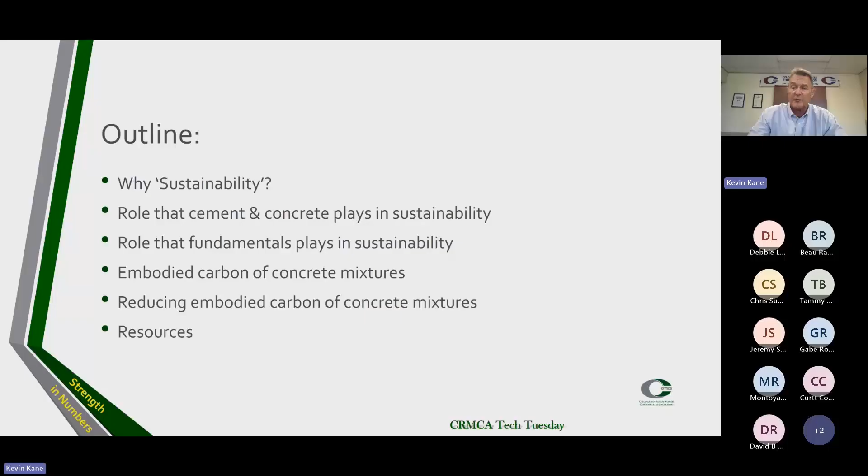Okay, the outline: why sustainability? We're going to cover some background on sustainability, the role that cement and concrete plays in sustainability, and then the role that fundamentals play. We cannot forget our fundamentals - we cannot be sustainable if we do not execute our fundamentals, kind of like blocking and tackling in football. We're going to talk about reducing the embodied carbon of concrete mixtures, and at the very end I'll share some resources I used to put these slides together. I'm also going to refer back to the Tech Tuesday presentations by Zach Ballard back in April and Jim Schneider in June - in fact I may have stolen some of their slides. I want to tie the whole thing together on proportioning, materials, and what we can do as an industry to reduce the embodied carbon of concrete mixtures. So with that, let's take it away.

Why sustainability? What is all this sustainability talk about? According to the UN Environmental Global Status Report, the world is projected to add 2.7 trillion square feet of buildings by the year 2060, driven by soaring needs for housing and infrastructure. That's an additional 2.7 trillion square feet, which is going to double our current global building stock. That's a lot of building.

The UN report urges the building industry to reduce embodied carbon of building materials, and also urges building designers and owners to reduce operational carbon by designing disaster-resilient buildings for the future with zero energy consumption. I want to make the distinction of embodied carbon versus operational carbon. Embodied carbon means all the carbon that went into producing a given product, whether it's concrete, cement, lumber, or steel.

Operational carbon means the amount of energy that took place after the building went into service. We're going to be talking mostly about embodied carbon, but I am going to start off with an example of operational carbon.

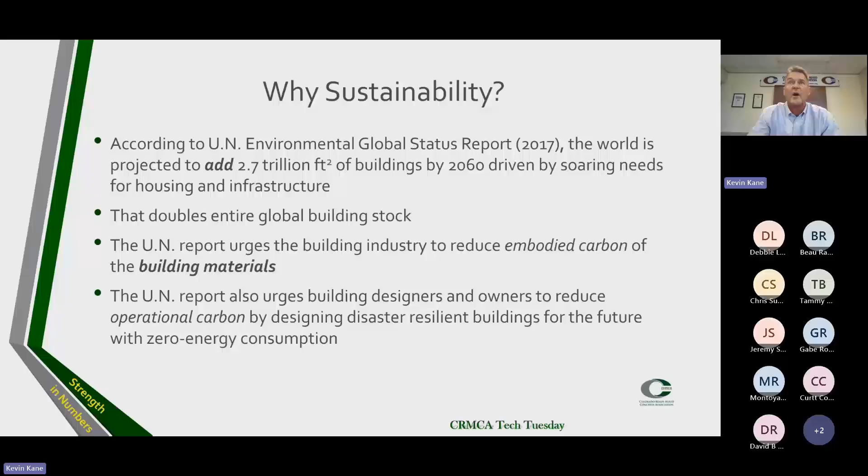To meet this challenge, the NRMCA adopted Architecture 2030, the challenge in 2012. The goal was to reduce operational carbon and embodied carbon from the built environment to net zero by 2050.

Reducing these carbon emissions is the key to addressing climate change. Now, it doesn't really matter who you voted for, where you lean politically. Doesn't matter if you voted for Trump, doesn't matter if you voted for Biden, doesn't matter where you sit on the political spectrum. Sustainability is a business necessity. So keep that in mind. A lot of people get emotional about climate change and global warming, but let's just keep this on a business level, how it affects us as a business.

In 2021, the NRMCA reaffirmed its commitment to reducing its carbon footprint by supporting the PCA roadmap, which is actually now the ACA, for American Cement Association. They changed just in the last couple months to the American Cement Association. So the NRMCA reaffirmed its commitment to reducing its carbon footprint, supported by the ACA roadmap to carbon neutrality.

Sustainability is therefore a strategic business necessity. Like I said, doesn't matter how you feel about global warming or climate change. It's a strategic business necessity.

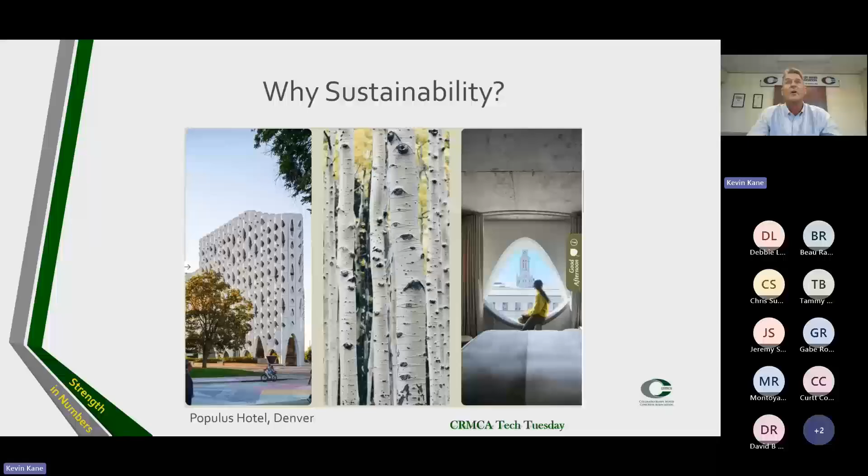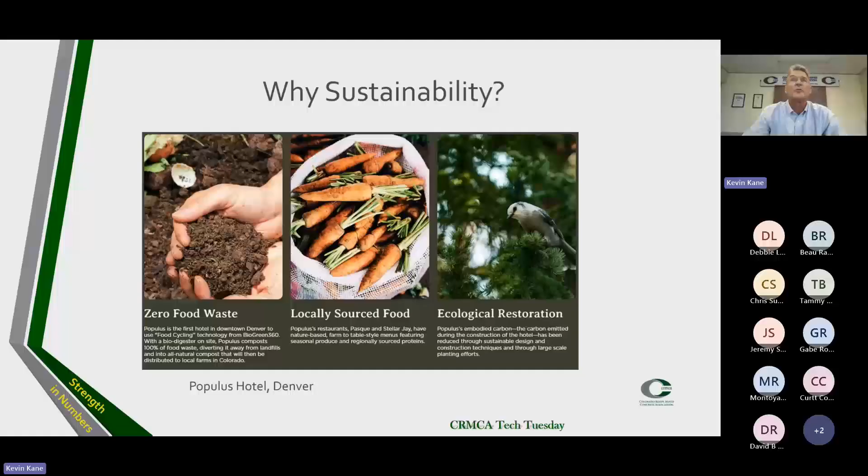Here's one of the rooms, and the thing I really like about this hotel is there's a lot of exposed concrete. So it puts our product right out there as a showcase. Some people may go, my God, why did they pick exposed concrete for the rooms? Well, there's a reason for that. We'll get into that in a couple slides. But so it's a very unique hotel.

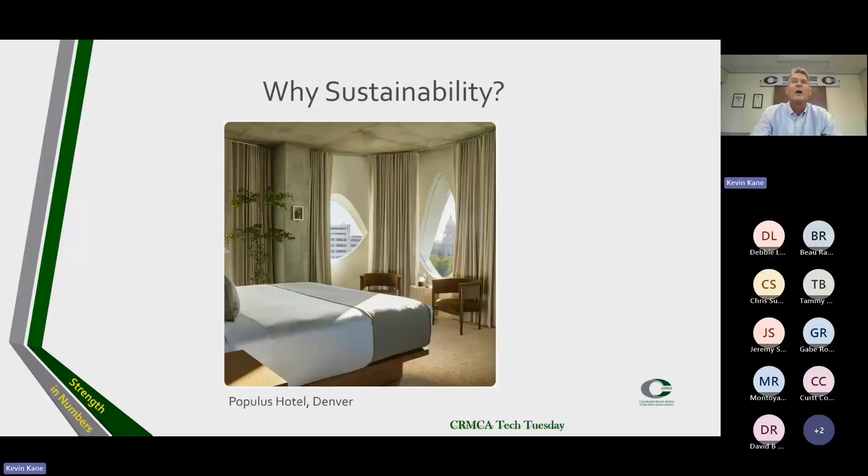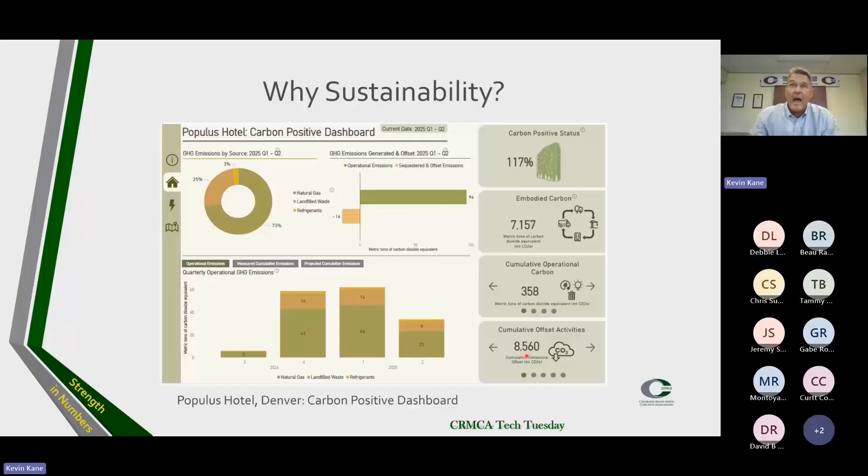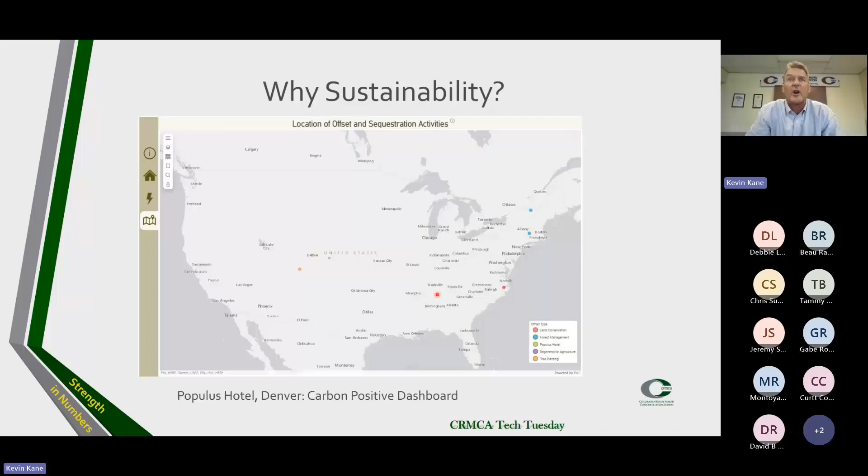They went negative, so they had to capture some offsets on this. So they went around the country and they planted. Here we are, here's the Populus Hotel in Denver. Well, there's a little dot way over here in Gunnison. They're doing a lot of tree planting and reforestation in Gunnison. They're doing some reforestation efforts in Massachusetts and Vermont, and they're doing some tree planting down here in North Carolina. So there's a lot of creative things they can do to maintain a carbon positive status, which I think is really kind of neat.

So that answers the question, why sustainability? It's a strategic business necessity. If one business did it, and they have customers, their customers will take these ideas to other businesses. This isn't going away. Everybody is going to be attracted to building structures like this.

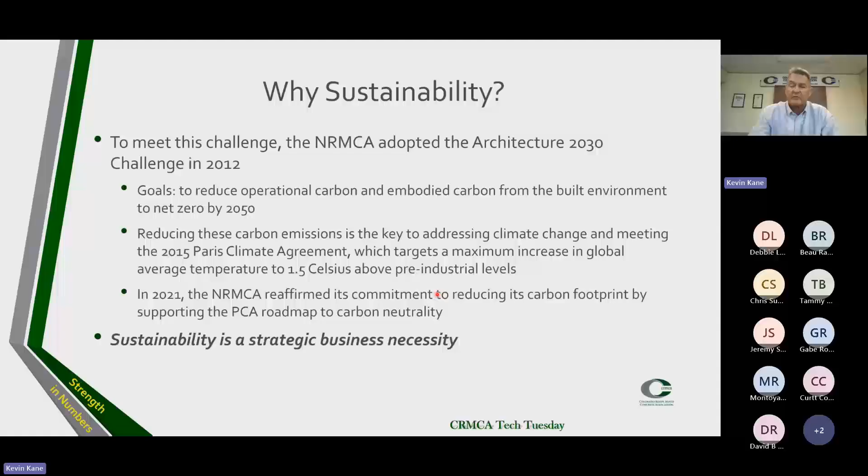So that brings us to us, the cement and concrete industry. Now, how are we viewed right now? Well, kind of negatively, right? So look at some of the glaring headlines from the media.

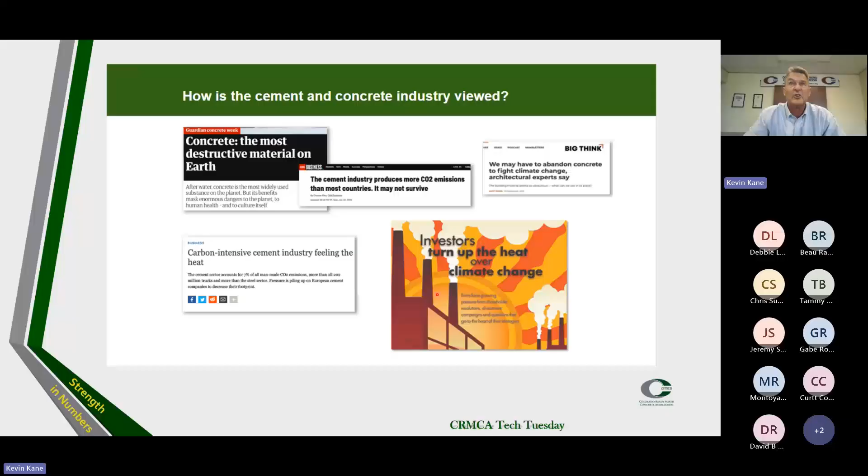Concrete, the most destructive material on Earth. The cement industry produces more CO2 emissions than most countries. It may not survive. We may have to abandon concrete to fight climate change, architectural experts say. So it's kind of doomy and gloomy out there. Not a lot of good news.

So this reminds me of the scene from Apollo 13, in the middle of a crisis, where Gene Kranz, who was in charge of all the nerds at Mission Control in Houston, said, let's look at this thing from a standpoint of status. What do we have on the spacecraft that's good?

We've got a lot of things that are good about concrete. A UN report urges building designers and owners to reduce their operational carbon by designing disaster resilient buildings. What's more disaster resilient than concrete? You know, we've all seen the images of the wildfires in California, the flooding down the Guadalupe River, the hurricanes down the Gulf Coast. Concrete is a very disaster resilient building material, and we should play that card.

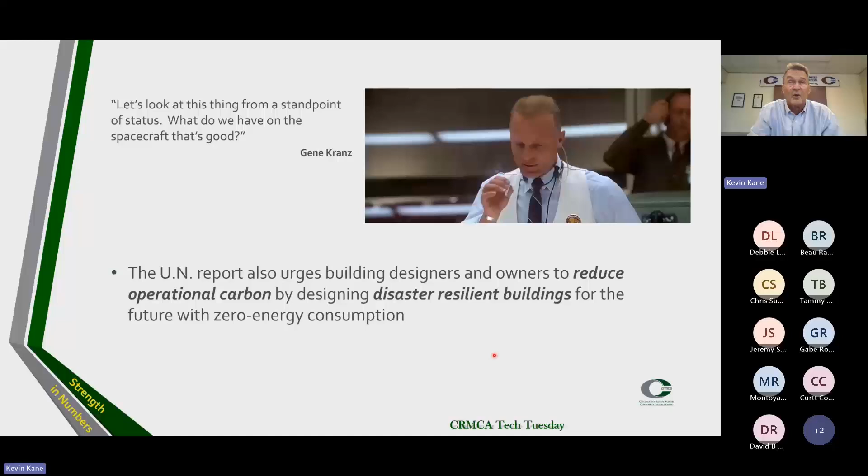Concrete is also a low VOC emitter, volatile organic compound emitter. That's why the Populus Hotel chose to leave a lot of the concrete exposed and not cover it with wall coverings that do emit VOCs.

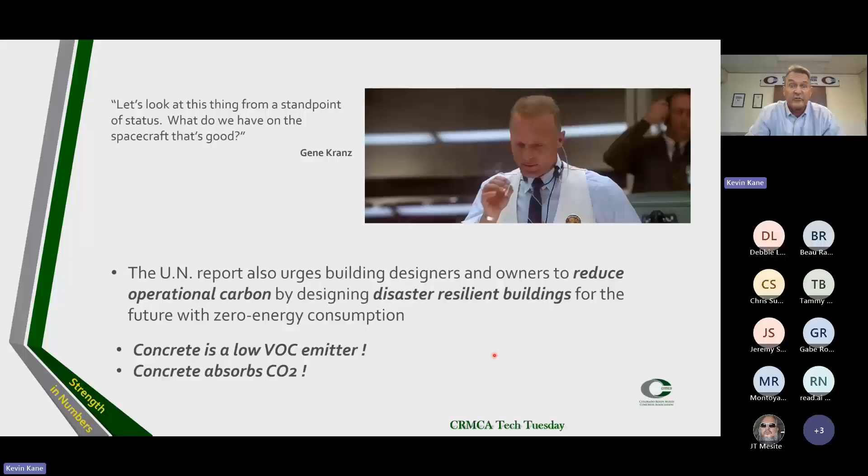Concrete also absorbs CO2, which years ago we didn't think was that big of a deal. Well, we think it's a pretty big deal now. In fact, there's some research that says during the lifespan of a building, the building will have absorbed half the CO2 it took to build it. So that's a pretty neat attribute, provided your reinforcing steel has the proper amount of cover on it. So concrete absorbs CO2 - that's a positive.

So what are the negatives? Okay, concrete is the most used man-made substance on Earth. It's not going away. You're not going to be able to have civilization without concrete. Now, cement manufacture contributes to 10 to 12% of total CO2 emissions on Earth. So we're one of the big polluters on Earth.

So to lower the embodied carbon of concrete, we must lower the embodied carbon of cement. And here's an example of a concrete mix design. This calculation was published in the CDOT white paper on the development of CDOT embodied carbon benchmark limit values for the Buy Clean Colorado Act. If you look at the calculations here, the cement is responsible for 90% of the global warming potential of this particular concrete mixture. So to lower the embodied carbon of concrete, we must lower the embodied carbon of cement.

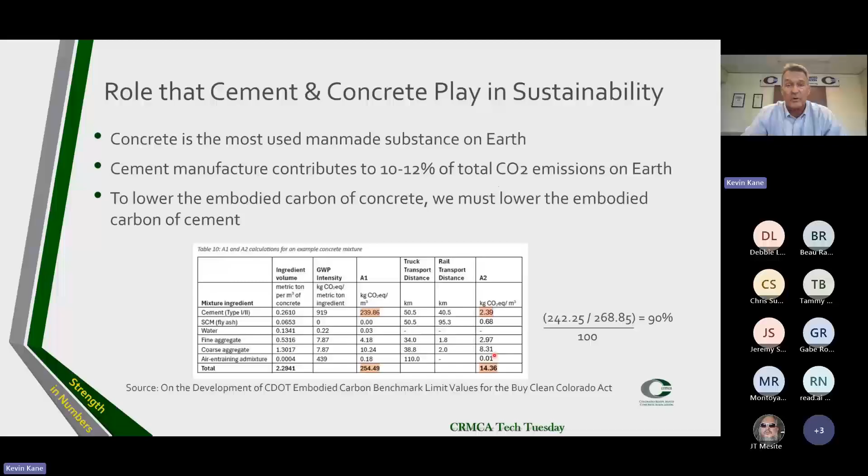So how do we do that? Well, let's get into a cement plant. This is a typical cement manufacturing facility. It's a highly complex process.

It all starts here in the quarry with very heavy machinery, very heavy excavating equipment that burns an awful lot of diesel fuel. Then we go to a primary crusher, which operates off a very large, high horsepower engine. Then we go to a raw mill that has an even bigger motor, 6,000 horsepower at the Holcim Portland plant. Then we go into the pyro process - the kiln, preheater, and pre-calciner.

This is where most of the energy is required to drive the calcination process. We're mining calcium carbonate, and we have to convert it to calcium oxide. In the process, we release 40% of its original mass in CO2. So the calcination of the limestone to calcium oxide is a big polluter. And the fossil fuels it takes to get the kiln to the 1500 degrees centigrade temperature to kick off that calcination process - that is also a big CO2 emitter.

So you can see the bulk of the CO2 emissions come from this little section right here. It's all in the pyro process. So we're not going to put a dent in anything by converting our equipment to batteries or to natural gas.

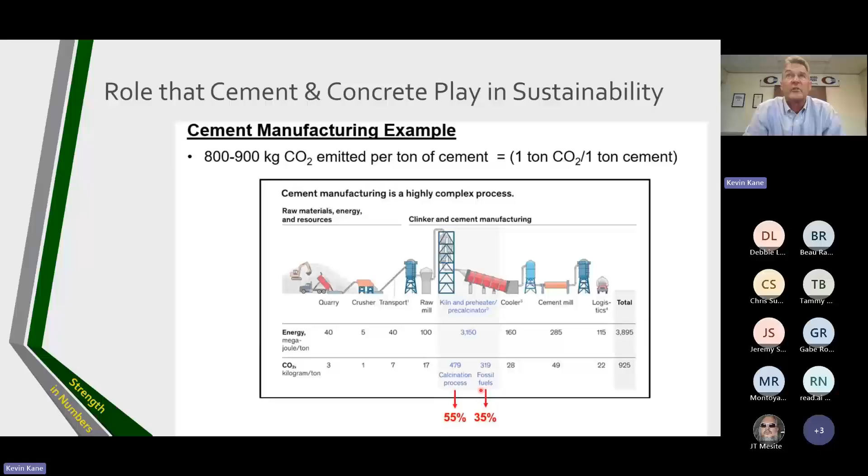So to lower the embodied carbon of concrete, we therefore must lower the embodied carbon of the cement. Now, over here on the left, let's look at ASTM C150 Type 1-2 cement post, say, 2005. Post-2005, it had 5% limestone, roughly 4% gypsum, and it was ground with roughly 91% clinker. So it's this 91% clinker in ASTM C150 Type 1-2 cement post-2005.

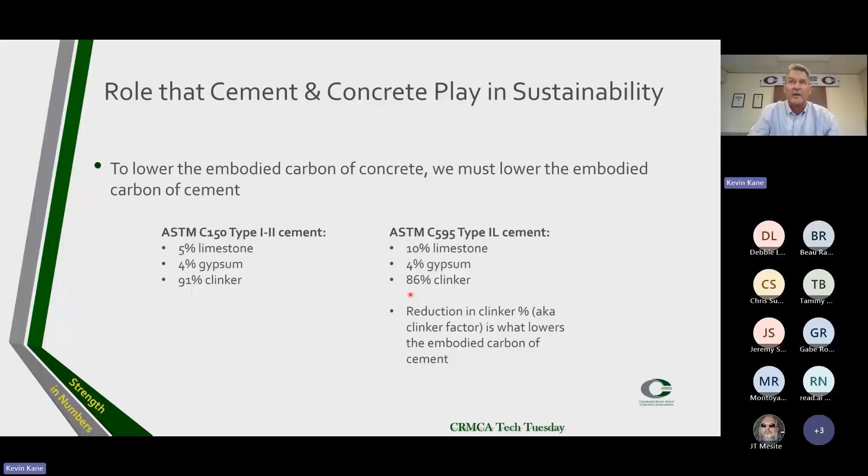ASTM C595 Type 1L cement has 10% limestone, or up to 15% limestone. Presently, most producers are around 10% limestone, and again, roughly 4% gypsum. And now we've reduced our clinker factor from 91% to 86%. So it's this reduction in clinker percentage, also known as the clinker factor, that's what lowers the embodied carbon of cement. So that's the only lever we have to pull right now on the cement side.

So Colorado passed a Buy Clean Colorado Act effective January 1st of 2025, and they set these benchmark limits on global warming potential of our concrete mixtures. So for everyday Class D concrete, which is the bulk of our CDOT work, the global warming potential limit is 365.1 kilograms of CO2 per cubic meter.

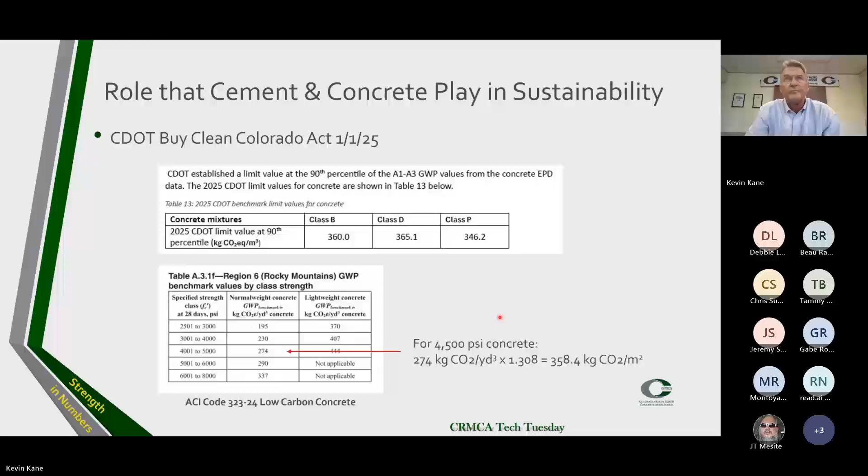So let's talk about the role that fundamentals play in sustainability. Concrete with higher variation with respect to compressive strength performance will need more cement than concrete with lower variation. Kind of hard to get around that.

And from the ASTM C917 report, Tony Fiorato wrote, to minimize the variability of concrete, it is necessary to control the uniformity of constituent materials as well as the uniformity of batching, mixing, transporting, placing, and curing. Tony Fiorato is a pretty smart guy. He pretty much nailed it.

If you want low variability in concrete, you've got to control the uniformity of your materials and your processes. So, as ready mix producers, insist on good quality materials that are consistent. Insist on consistent processes from your operational departments: measuring, batching, mixing, transporting. And if you're on the testing agency side, on the QA side of the business, insist on good quality control and good quality assurance testing.

And let's also promote good construction practices. This is kind of an important one because it seems to be a hot topic right now, because a lot of contractors are really struggling with the changes that have been made from concrete made with ASTM C150 Type 1-2 cement to now ASTM C595 Type 1L cement. So we really need to get out and promote good construction practices so we don't have so many problems associated with finishing problems, plastic shrinkage, and scaling in the field.

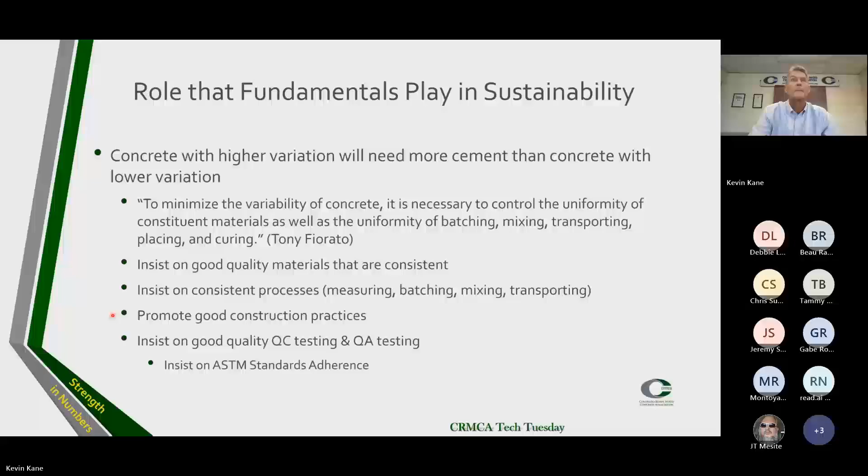Going back to what Zach Ballard presented, you can't control what you don't measure. Low variability, you're going to make money. High variability, it's going to be tougher to make money.

If we look on the left side of the scale here, here's our required 3,000 PSI. If you have low variability, you only need to average, in this example, 3,326 PSI. If you have high variability, if you don't have good control of your materials and your processes, you have to average a much higher compressive strength to satisfy this 3,000 PSI mix requirement.

So low variability is good. High variability, bad. It's going to cost you more money, and it's going to take more cement, which is not in line with sustainability.

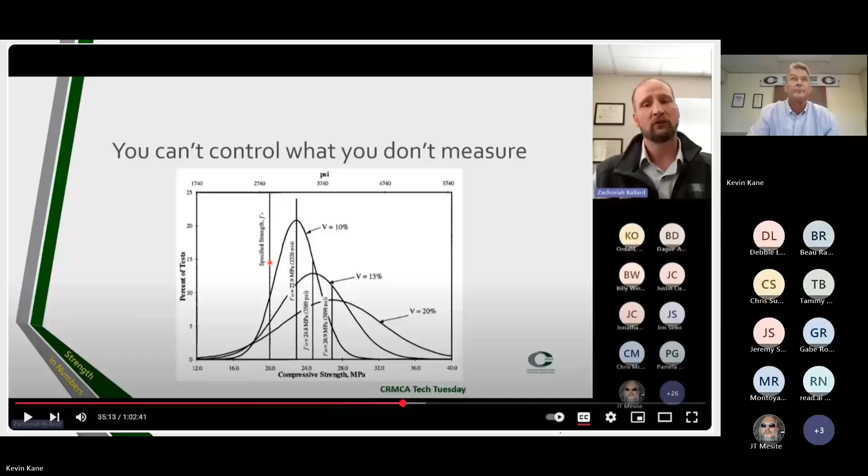Insist on ASTM standard adherence. Boy, oh boy, I've been doing this for 35 years now, and we're still talking about adherence to ASTM standards in testing. And the elephant in the room is always the initial curing. It's a challenge for the testing agencies to supply the proper curing facility for every job they're going to test that day.

But you've got to get out in front of these things in the pre-construction meetings. Post-construction meetings are not the time to talk about initial curing. Talk about those in the pre-construction meeting, when it can be decided who, how, when, where are they going to put the initial curing facility.

If we take a look at this study that we did back in 2014, this was a test fest, a CRMCA test fest event that we did in Grand Junction, Colorado. This is 3 sets of cylinders cast from the same sample of concrete, and we varied the initial curing conditions.

The first set of cylinders was put in a Rubbermaid cooler filled with water. Not very scientific, a Rubbermaid cooler that at that time you could have bought from Walmart for 20 bucks. You fill it with water, put your cylinders in there, and measure your min-max, and this is well within the specification limit of 60 to 80 degrees. This is the resulting compressive strength of the properly initially cured test specimens.

Another set of cylinders from that same sample of concrete, we put them in a Rubbermaid cooler with no water for a 24-hour initial cure. And look what the temperature went up to. The heat of hydration from the concrete cylinders was detrimental to maintaining that 80-degree maximum temperature. It went up to 105 degrees, and there was a resulting decline in the later age strength development.

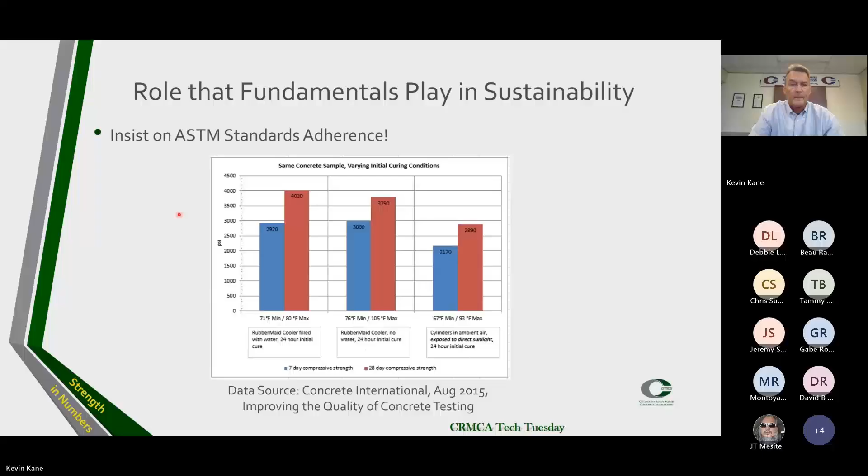And it's not always the testing, it's not always a test. Sometimes it's us, and we have to admit that. Here's 2 mixes that Dave Figurski and I ran back in January of 2025, where we wanted to test some of the plastic and hardened attributes of our Utah plant, Devil Slide in Utah, with our Type 1T cement.

So we made our first mix. We gathered an aggregate sample from a local producer right here in the Front Range. We didn't particularly like the sample of coarse aggregate that we got - the gradation was way too fine, it was pretty dirty - but we ran the mixes anyway. And we ended up having to discard the whole series because we didn't like the results we got.

We went out and got another sample of the same source of aggregate. This time the quality of the aggregate was right where we wanted it, and look at the difference it made in the proportions. Both of these proportions produced about the same workability - look at the difference in water content.

This mix took 335.6 pounds per cubic yard to get that 3 1/4 inch slump. This mix, with properly graded and proper clean aggregate that met the specification, only took 315.3. And we actually had 10.8 pounds of water left over, producing the same amount of workability. Look at the difference it made at 28 days in compressive strength, over 1,000 PSI.

So it's not always the testing. We have to insist on adherence to standards of testing. We also have to insist on adherence to standards of the materials we're making our concrete with.

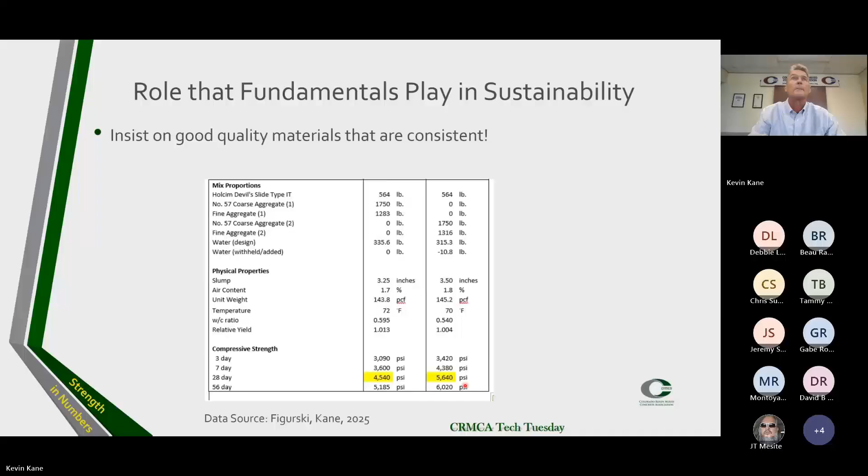This was on Jon Belkowitz's LinkedIn page just last week.

With respect to the role that fundamentals play in sustainability, actively managing problems versus reacting to problems is so important. Stay a step ahead rather than three steps behind. Recognize the root causes to the common problems and take the steps to minimize their reoccurrence. Think the process through and manage your obstacles and challenges.

Removing and replacing concrete is certainly not a sustainable practice. Root causes to common problems - what's a common problem everybody's having right now? Are we having problems making our concrete, controlling our concrete? No, but our customers, the contractors, the finishers, they're certainly having some common problems. So that's where we get back to the construction practices. If construction practices weren't important before, they're sure important now.

None of the practices that we're advocating are any different than what they were before we made concrete with ASTM C595 Type 1L cement. It's just that not everybody was following them by the book. The book is written for a reason, by very accomplished professionals that know their business. These aren't just people that read and write books and never get out of the office - these are professionals that write these construction practices, accomplished professionals that know their business. We have to follow the best recommended practices in the field.

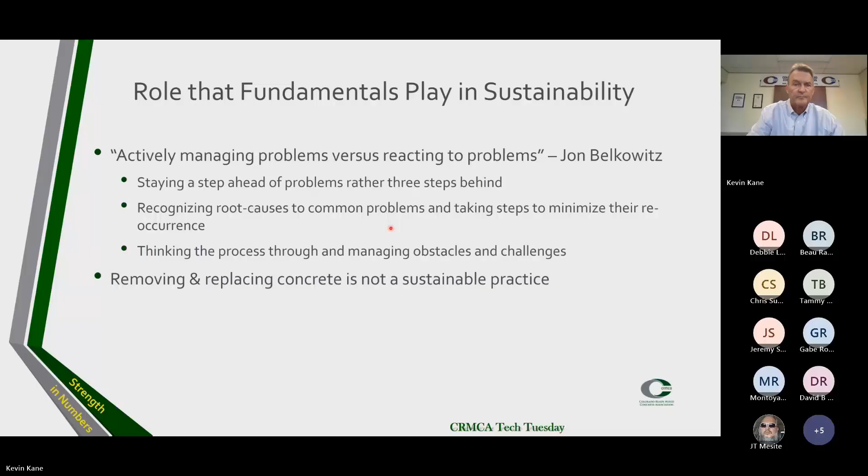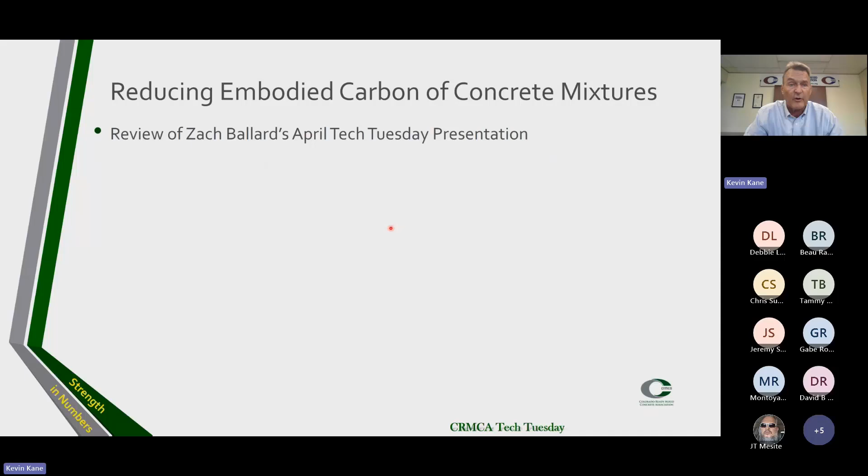Okay, reducing - let's talk about reducing the embodied carbon of concrete mixtures. And like I said before, I'm going to be throwing back to previous presentations - one that Zach Ballard did in April, and the other one that Jim Schneider did back in June. So let's go back to Zach's example on how he walked us through the steps in proportioning using ACI 211.

When he got to step 8, which is pretty much the final step in the proportioning, your work is not done yet. So he came up with a concrete mix that had 708 pounds of cement, 340 pounds of water, with these proportions of coarse aggregate and sand by following the steps in ACI 211. But your job is not done - now you have to go put them in a lab mixer.

But first, I'll bet there's not many ready mix producers out here that have a mix that has 708 pounds of cement and 340 pounds of water for a 5,000 PSI non-air entrained mix. And there's a reason for that.

They made adjustments. So in selecting the water content, yep, you follow step 3, estimation of mixing water and air content. And if you have a 3/4 inch aggregate and you want a 3 to 4 inch slump, you're going to need about 340 pounds of water.

But there are some exceptions. We need to follow these adjustment factors. So if you're using a rounded aggregate instead of a quarry stone, take off 8% of that water. If you're using a water reducer, take off 5%. If you're using fly ash at 20%, take off 20% water.

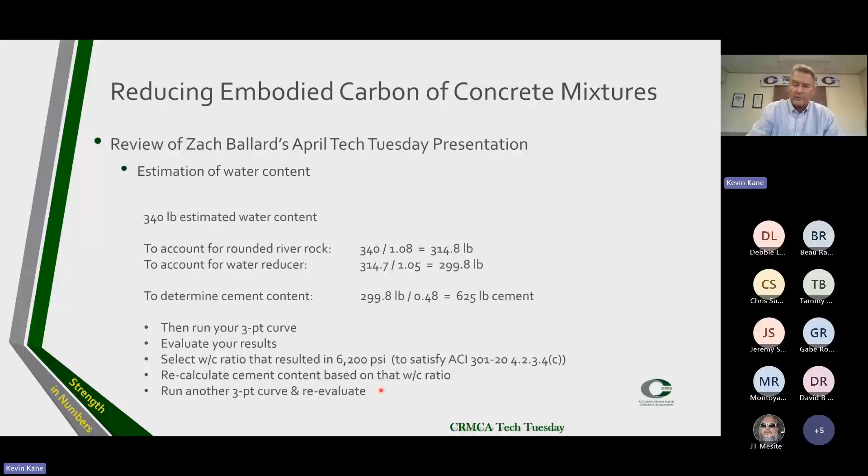A little pro tip too: you can avoid that whole accounting for water reducer if you choose to, instead of selecting... let's say you needed to design a 4-inch slump concrete mixture. These table values are based on the water slump that's generated, not considering the water reducers. So in my experience, if you're using a type A water reducer, this is where you want to be, in this 3 to 4-inch water slump range.

If you're using a high range water reducer, you could go down to a 1 or 2-inch water slump. And so you can cut out all that math by selecting your water slump and then verifying that you got it right. But if you're using high range, a good water slump is between 1 and 2. If you're using a type A or mid-range, a good water slump is between 3 and 4. We get in all kinds of trouble when we end up making negative 2-inch water slump concrete.

And by negative 2, how do you measure a negative 2 water inch slump concrete? If you're 2 gallons per yard away from your first slump measurement, if your mix is so dry that you have to add 2 gallons per yard just before you first produce your first quarter inch of slump, you're in negative slump range, and that's where the problems happen. Your mix is water starved, so you've got to have the right amount of water in the concrete. That's a pretty important fundamental.

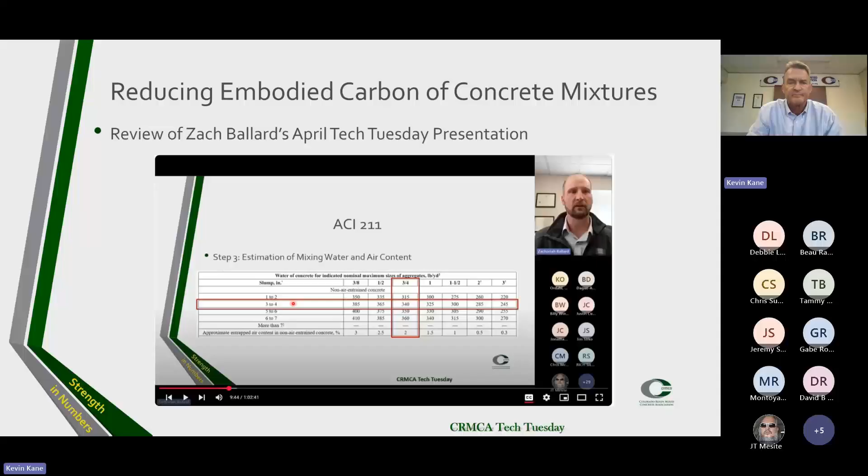So then Zach talked about aggregate packing and aggregate grading. A traditional mix design using ASTM C33 sand and ASTM C33 coarse aggregate, just 2 aggregates, you're going to end up with a gap graded aggregate, but it works just fine. You can make most concrete mixes with just rock and sand that meets ASTM C33. You can make concrete just fine all day long, every day. We did it for years.

But you can optimize and make more sustainable mixes and reduce some of that paste content if you optimize your aggregate grading. That's where you take more than 2 types of aggregate: a fine aggregate, a coarse aggregate, and an intermediate aggregate, and find that well-graded version of this. And if you can do this with your aggregates, you're going to use less paste, less water, less cement, and you're still going to have good results. So that's what's meant by optimizing your aggregate.

There's a lot of benefits to optimizing your aggregate, sustainability being one of them, because as you optimize your aggregate, you're going to be able to reduce your cement content. And then these are some of the tools that Zach talked about we could use.

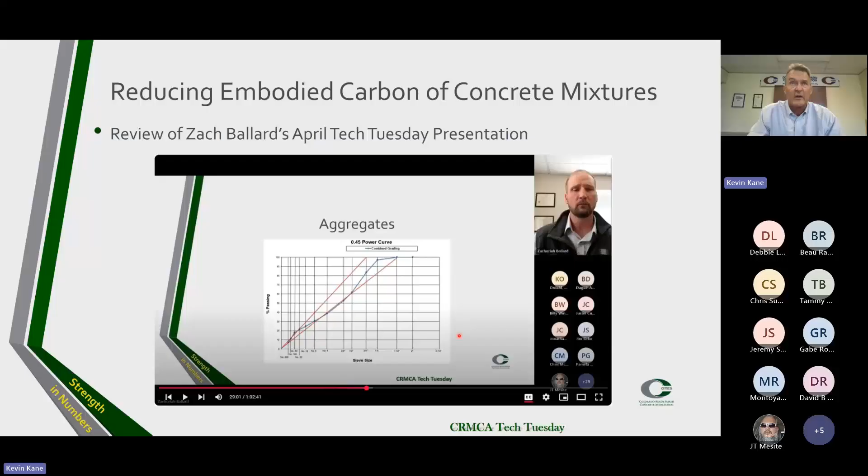Supplementary cementitious materials, what about pozzolans? Oh my gosh, when I first got in the business 35 years ago, we basically had one pozzolan, and that was Class C fly ash. Cut my teeth on Class C fly ash. Now it's kind of hard to find Class C fly ash. Class F fly ashes came around in the late 90s, and when I first switched from Class C to Class F, I was wowed by the benefits of Class F. Class F fly ash, while it doesn't have the strength activity of Class C, has a lot of other attributes: sulfate resistance, ASR mitigation. Class F fly ash is much easier to use.

Now, fast forward 25, 30 years, supplementary cementitious materials aren't scarce yet, but they're getting difficult to get. They may be getting scarce, but we're also going to get a lot more choices. There's a lot of different supplementary cementitious materials available today, and there's a lot on the horizon. Now, none of these are overnight fixes, but it's good that the work is being done, and at some point in the not too far distant future, not tomorrow, but in the not too far distant future, we're going to be able to use a lot more supplementary cementitious material choices than we currently have now.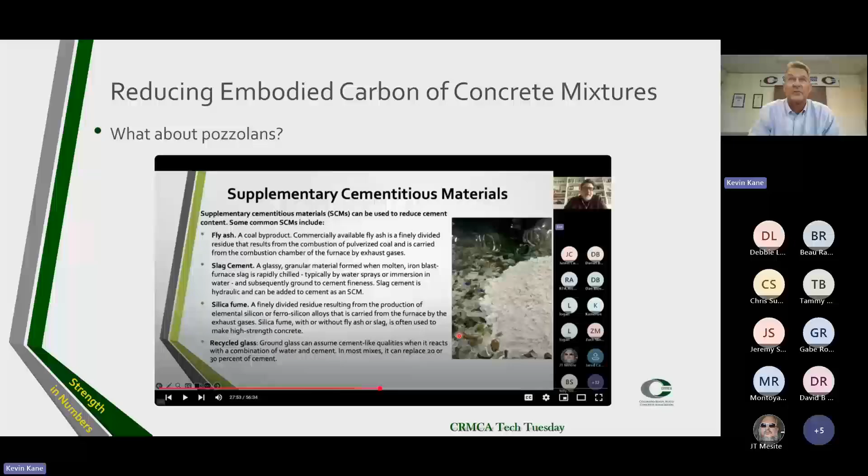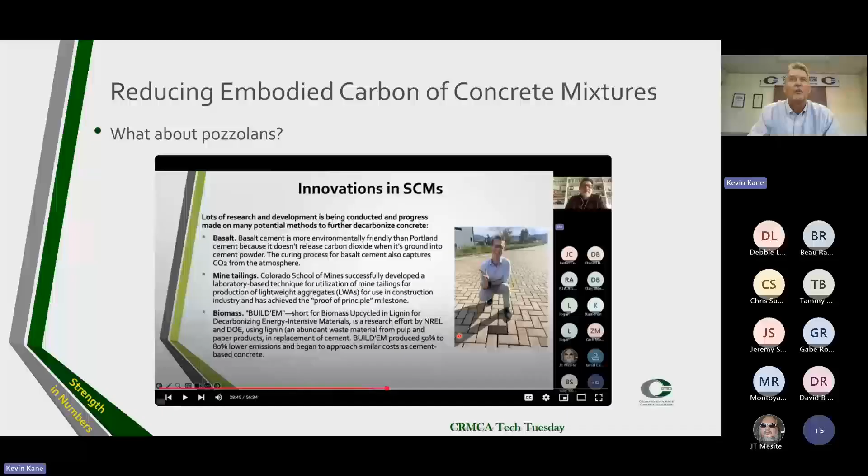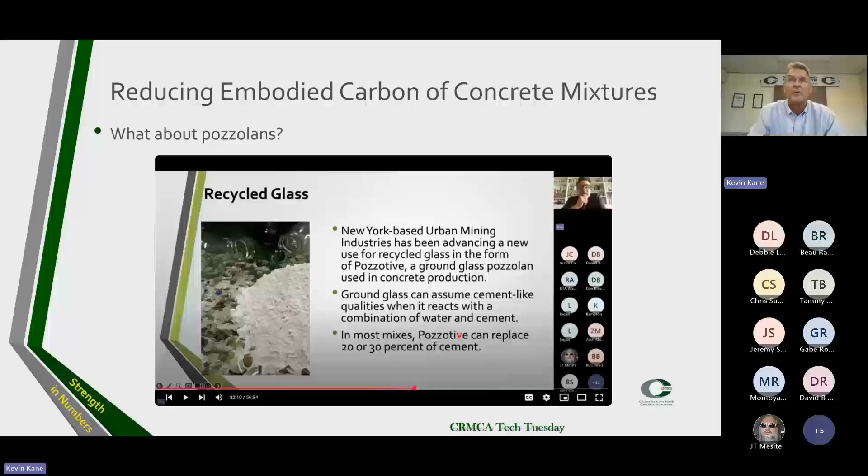And Jim Schneider, wow, he did a great job of laying out all the different innovations in SCMs: basalt, mine tailings, biomass, all these new innovative supplementary cementitious materials, recycled glass, this Pozzotive material. Pozzotive, a little play on words, it's a pozzolan. It makes a positive carbon impact. So there's a lot of interesting things about all these new materials.

Mine tailings, NREL, go work with the people at NREL. They've got an amazing concrete lab there, the National Renewable Energy Laboratory, right here in Golden, Colorado. What a facility, they've got very talented scientists from all over the world that work there, and they make concrete just like we do. They have a concrete lab just like we do. Reach out to these folks, they are testing some amazing materials, they are way ahead of us on R&D. We should be networking with NREL to find out what's, again, not overnight fixes, but on the horizon. It's exciting.

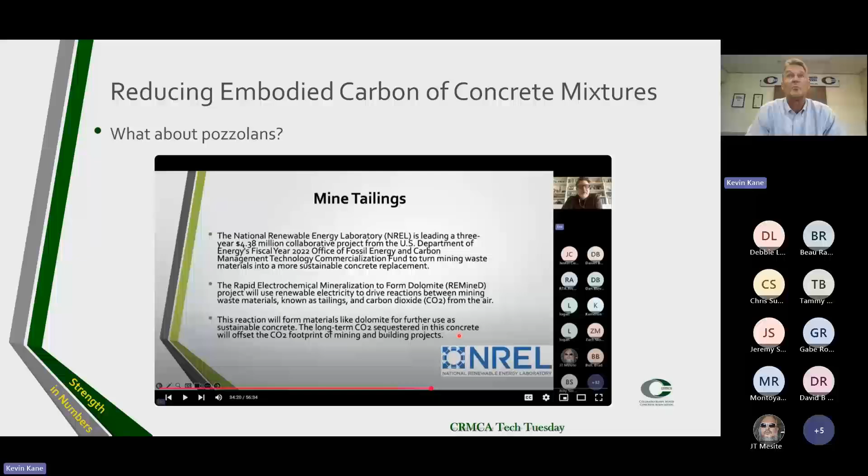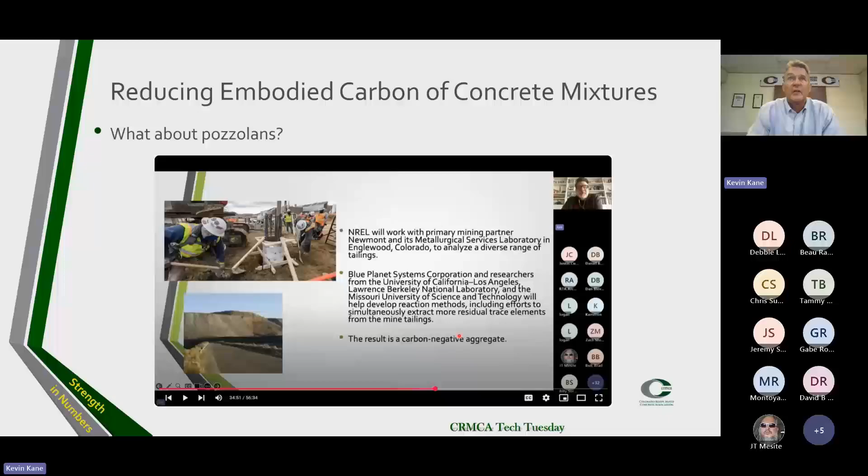Blue Planet Systems Corporation - they're doing stuff working with NREL, taking all these interesting materials. If you go back and look at Jim's presentation, you'll get a little bit more idea, and then you can research it on your own.

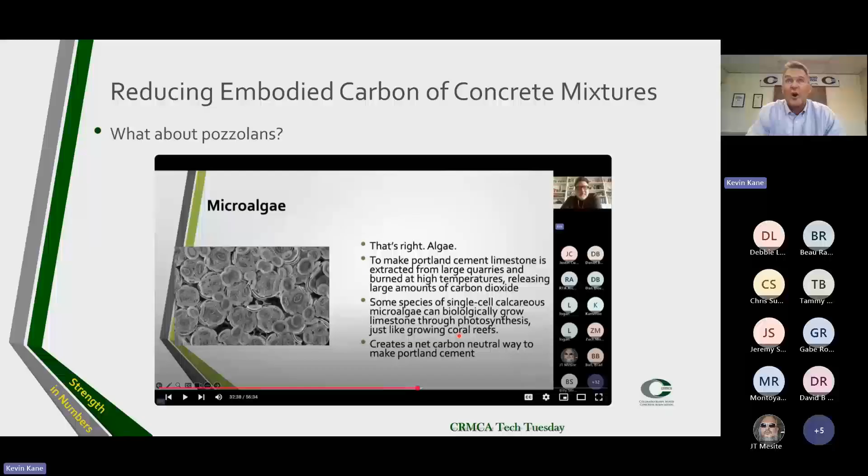Microalgae - who knew? To make Portland cement, we normally get limestone from a large quarry, but some species of single-cell calcareous microalgae can be biologically grown. It can biologically grow limestone through photosynthesis, just like coral reefs, creating a net carbon neutral way to make Portland cement. So all you need is 1 to 2 million acres of open pond systems, hopefully located by your cement plant.

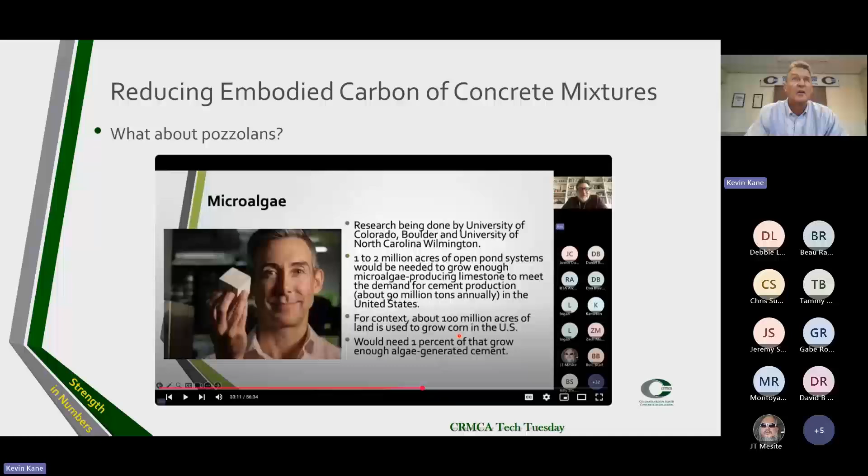Not an overnight fix, but it's really cool that a lot of these scientists are working on this stuff. So a lot of neat things coming our way, and there's going to be more neat things coming our way.

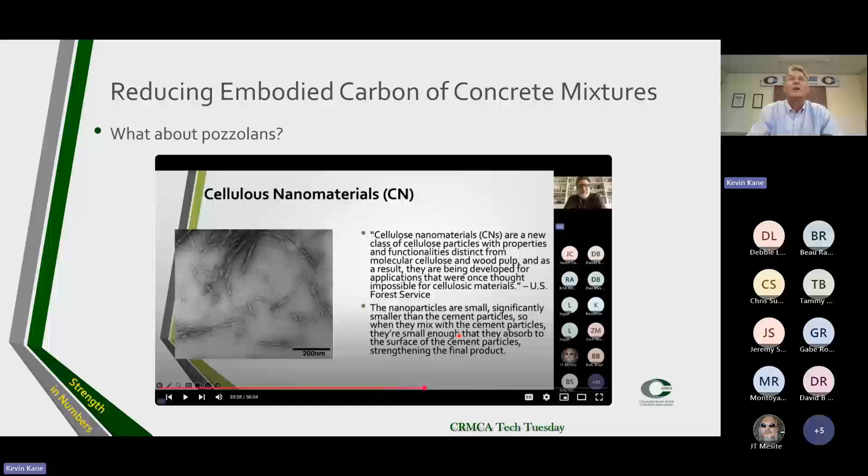What about pozzolans? It's a daunting list of possibilities, and again, a lot of these are not overnight fixes. It's going to depend on the materials available in your area, how many storage silos you have available - that's always the bottleneck. Not everybody has 8 silos to put cement and fly ashes in. Most people have what, 2 or 3 at the most. It's going to depend on specification acceptance.

It's exciting to bring new products into the market, but it's a challenge to get them adopted into specifications. And it also depends on how hard you want to work. None of this is easy, none of this is quick, it's all back-breaking, dirty work. But it depends on how hard you want to work.

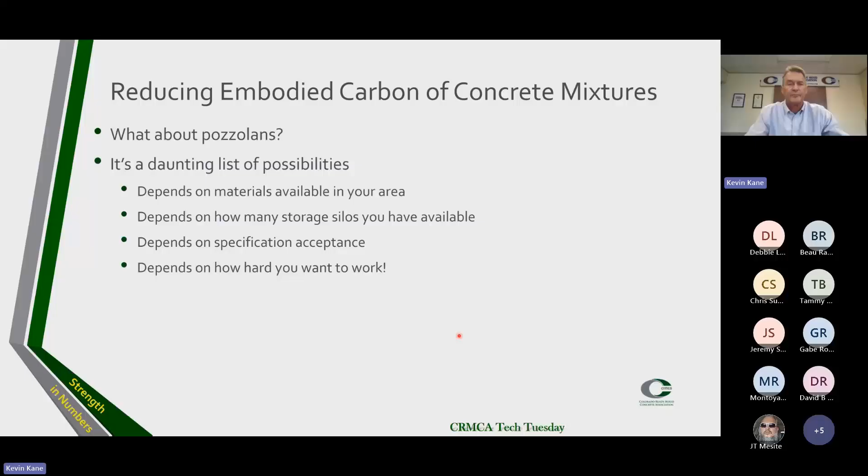So where do you start? You start with concrete trial mixes. Start in the concrete lab. Measure things, measure things like Zach talks about - you can't control what you don't measure. Start in the concrete lab.

Measure the slump life compared to a control mix. Measure your time of initial and final set compared to control. Measure your bleed water compared to control. We never used to pay much attention to bleed water - we kind of took it for granted until we started realizing that, wow, type 1L cements don't bleed as much as type 2 cements. So then we started really paying attention to it.

But time of initial and final set - the worst thing you could have, when you don't have a concrete mix that supplies a good amount of bleed water to the surface, is a concrete mix that's very retarded and takes a long set. That's not a good combination. Long set time and little bleed water is not a good combination, because what do we get then? We get plastic shrinkage potential.

When we did the Ocean Journey Aquarium back in 1996 or 97, that was a very challenging 6,000 PSI mix with, at that time, the only high-range water reducer available was an old naphthalene formaldehyde sulfonate. Its effect on that concrete mix was it was very retarded. And I measured it - 16 hours, 16-hour initial set times. I sat there and measured those well into the night, well into the early morning.

But I was able to go to Hensel Phelps and say, oh yeah, about this mix you're going to be building this aquarium with, you really need to know this - it's painfully slow to set. And they weren't happy, but it gave them a clue on how they were going to time their forming.

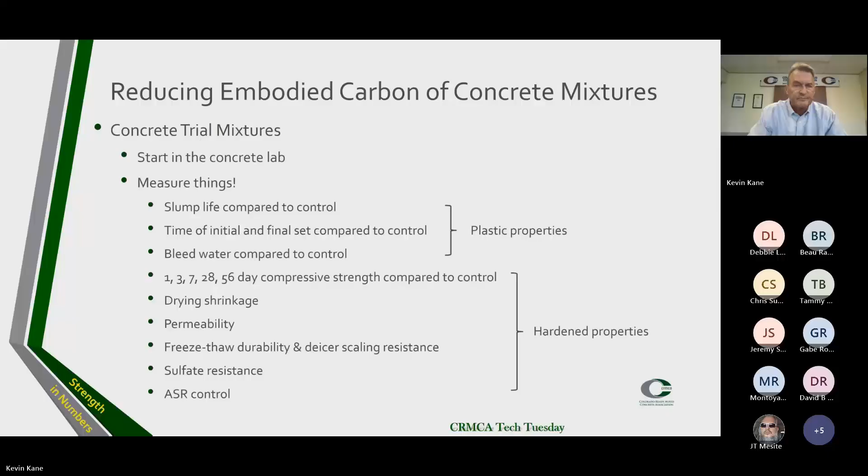So start in the concrete lab. What do you do next? Do you go right from the lab to the field? Nope. Let's do some test batches at the plant. Let's make sure we can reproduce in the plant what we made in the lab.

Do mock-ups with contractors. Invite your contractors and say, I want you to test this new mix that I've come up with. Here's the application, here's the rationale for it. I want you to use it and give me feedback, give me an honest assessment so I can make any adjustments necessary.

Collaborate. Collaborate with your suppliers, collaborate with your contractors, collaborate with the project team. You can negotiate on a carbon budget for the project.

If you have a high-rise building that has 5,000 PSI PT deck mixes, post-tension deck mixes, what do they want? They want 3,000 PSI in 3 days. Not really, they want 3,000 PSI in 2 days. They'll tell you 3, they mean 2. Is that where you want to compromise the mix for a carbon budget?

Maybe you can negotiate the carbon budget with the project team. Say, let me do a higher GWP mix for the PT deck slabs. In exchange, I'll do your walls and footers with 56-day compressive strength with a much lower GWP than what you specify. So you have to be a team player and work with the project team, work with your suppliers, work with your contractors.

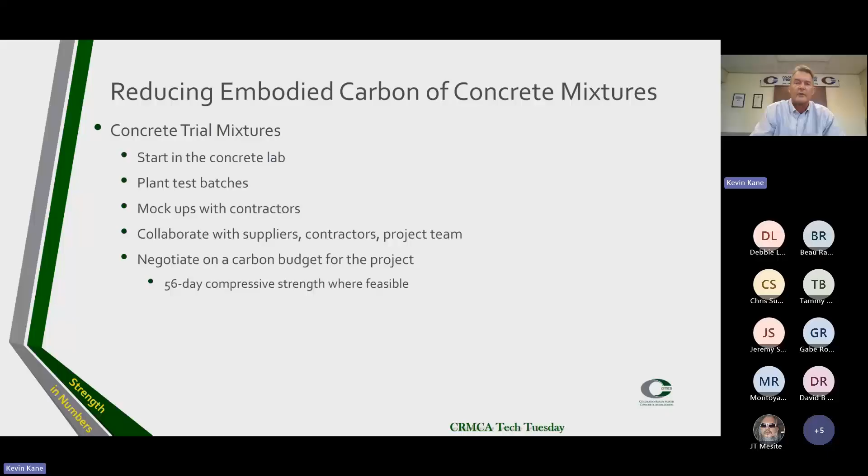Now here's a mix. I'm just about wrapping up here. So here's a mix that hasn't seen the light of day since I ran it. I think I've only shown this mix to one other person—well, actually, Tom Pello and Tom Green. But this mix never made it out, never made it past the laboratory.

I ran this mix in 2000 when I worked at Aggregate Industries. And the reason I ran it was because I was bored and poorly supervised. No, just kidding. I was very curious, and I like to make concrete. I like to throw a lot of stuff against the wall and see what sticks.

So here's where my materials were. I took C150 Type 2 LA cement from, at that time, Holnam. Class F fly ash from, at that time, ISG Resources. I took microsilica from Master Builders. I took a pea gravel and sand right out of the Platte River pit from Aggregate Industries' Thornton pit.

I used Master Builders 3000 FC, Master Builders Micro Air, and just for kicks I put in an SRA, Tetraguard, and a corrosion inhibitor. Now, are we ever going to have to make that kind of concrete mix? Probably not, but like I said, you don't know until you try it. Let's see what we get.

So I put together this mix, only 476 pounds of cement. Look at how much fly ash I got in there, 30% fly ash, and another 7% of silica fume on top of that. I've got my high range water, and I don't have a ridiculously low amount of water.